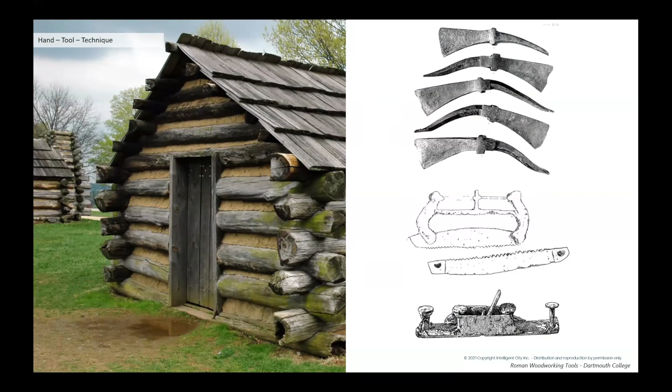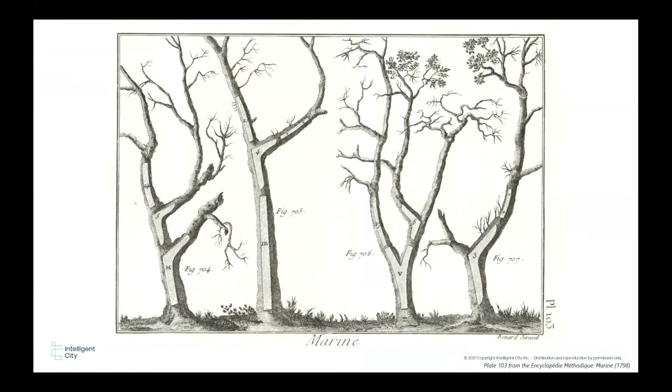A quick history lesson, because I think it's really interesting to note that the tools we use have always influenced how we design and construct buildings. In the pre-industrial era, manual work and tools led to highly efficient and unique building components requiring minimal machining. But these building elements used to be made specifically for a specific purpose in a specific shape. That uniqueness kind of got lost through industrialization as it led to mass production and standardization. That obviously increased the potential output of our industry, but it also led to repetitive processes, and most importantly, to a fragmentation of our industry that has basically inhibited innovation for many, many years.

Other industries have since developed technologies that allow them to introduce variability within scalable manufacturing technologies. However, and this is very important because I'm sure you have seen this picture, buildings are not cars. The term mass customization is misleading in that the main parts of cars are actually standardized. Building systems and buildings need much more flexibility and adaptability to become applicable on a larger scale and to really break through with the sort of platform paradigm.

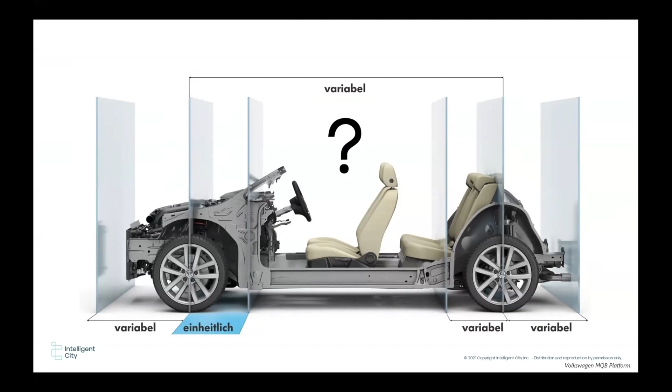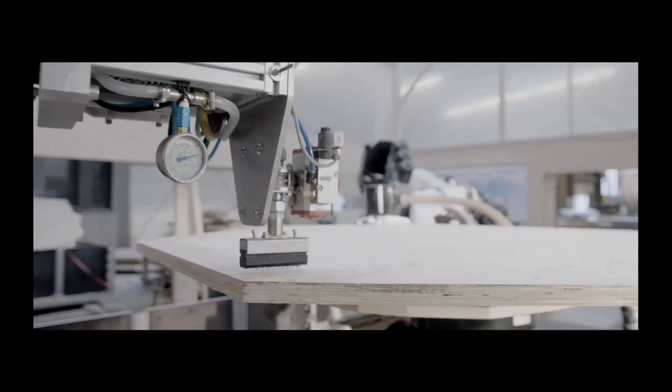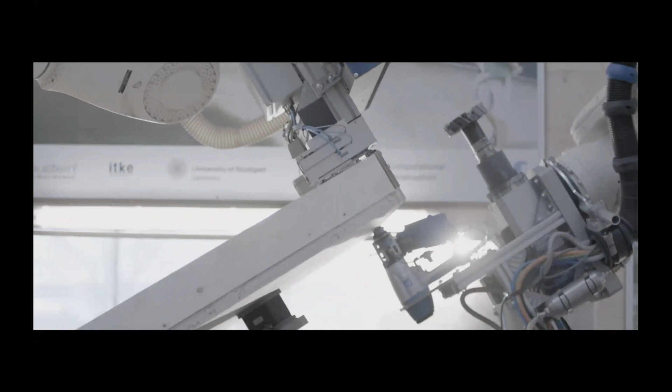In my previous job, I worked at the Institute for Computational Design and Construction at the University of Stuttgart, where we explored the potentials of novel manufacturing technologies for construction and architecture at scale. We developed manufacturing technologies and ultimately in conjunction with design and structure, which led to many projects that showcased what an integrative approach in our industry could look like.

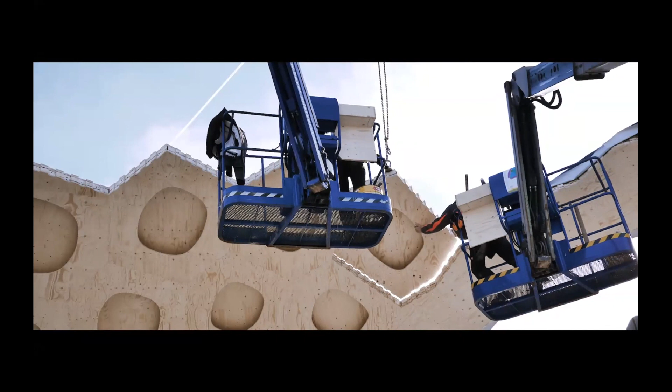What if we don't design only the design, but we design the design system, we design the manufacturing of the design system, and we design how we design as well. The journey of our industry throughout the centuries, I believe, can be seen as a negotiation between adaptability, the flexibility of design, the design system, and manufacturing intelligence - how manual, how automated, how ultimately intelligent and adaptable it also is.

Recent innovation has opened up opportunities for platform-based design processes and automated manufacturing. That's no surprise. But the adaptability and versatility needed in architectural platforms to be successful is really still missing. At Intelligent City, we believe that instead of falling into the trap of one-off parametric projects or standardized industrial prefab, the future really lies in between, in the convergence of high-tech manufacturing with a lot of adaptability and parametric design, which ultimately leads to scalable processes.

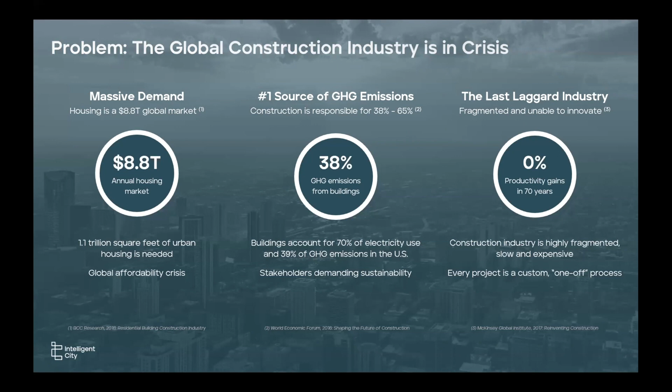And this is what we call parametric platforms. With the challenges we are facing today, it is really inconceivable why our industry has not yet found scalable and adaptable technologies to deliver buildings more efficiently, more affordably, and with zero carbon footprints. This is why Intelligent City has developed a parametric platform for 4 to 18-story mass timber urban housing projects.

We combine 3 paradigms that one could say were previously unfamiliar to our industry. A product-based design approach to develop the building as a product to make sure it is socially inclusive, affordable, and has high livability metrics. We focus on mid-rise densification because that's where we also see the biggest potential for cities to grow. It's a platform-based development process. It's infinitely configurable across building designs. It has pre-integrated design engineering, and it uses mass timber as a primary material because it's the most promising building material that we have and the only one that promises to be carbon zero.

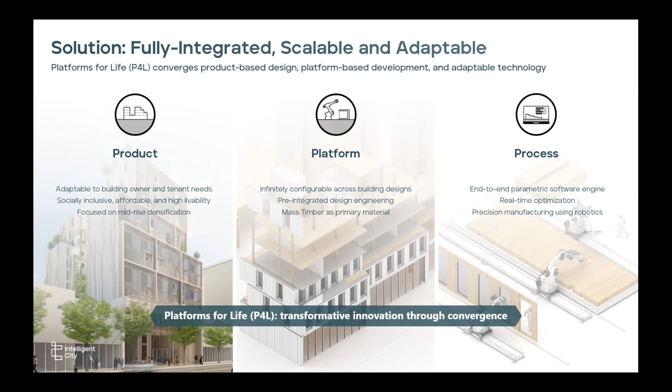And we combine that with an end-to-end parametric process that also includes manufacturing technologies in order for us to be in control of how things are being manufactured. This is what we call platforms for life, transformative innovation through convergence. And I want to talk a little bit about all three of these aspects and how they sort of come together into this product-based approach of a building and how flexible it ultimately really is.

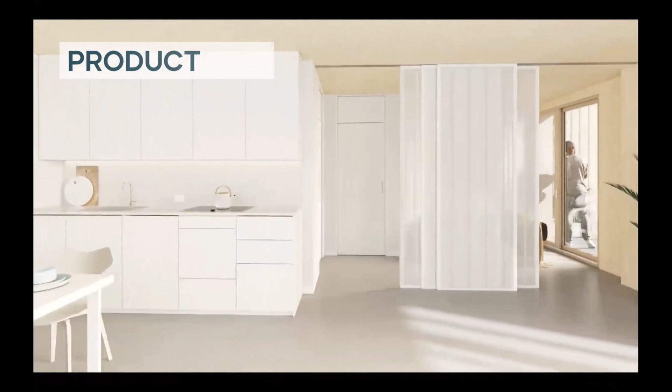The product is the result of over a decade or even 2 decades of experience in urban livability. The founders of Intelligent City have worked in this realm as architects for a very long time. And we created this product in order for it to be livable, to create a sense of home, to enable communities and inclusion. There are many design aspects inside of this DNA that we have developed.

Compared to typical projects, our buildings provide more sunlight, more cross-ventilation. There are double-sided apartments. You don't have double-loaded corridors with interior bedrooms. And most importantly, they are just higher quality. They need less space. You can live, you have more livable area with less required infrastructure space in your building. And therefore, we can also have more apartments in a building without losing any of that quality.

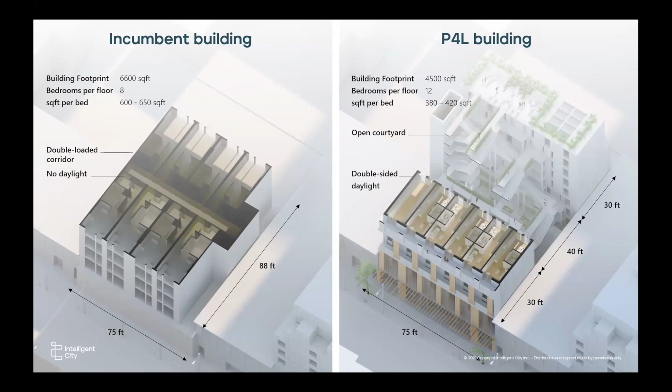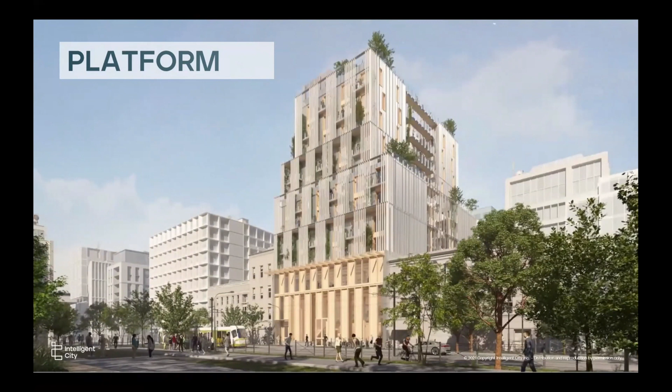Our building platform is based on a number of parametric components. These are, most importantly, integrated double-layered floor panels that already include from the factory certain mechanical and electrical components, passive house envelope panels, all made from mass timber.

So we create the core and the shell of the building as fast as possible, and it's completely made out of mass timber. The componentry is not a kit of parts. It is based on a range of grid spacing that allows us to adapt every building shape to various sites and needs. It enables this sort of flexibility. We can deliver small and larger projects with different shapes and different heights.

This is part of the design process, the design system, within which you can navigate. But most importantly, the platform integrates the design philosophy in that a library of apartment types can be assigned to the building system. It is based on a certain grid spacing that is variable. You can include 1 bedroom, 2 bedrooms, depending on how many grid spaces you want to occupy.

But we also try to make sure that the apartments can be changed later on. If there is a change in the building life cycle, which surely will happen in 25, 40 years, and you want to combine multiple apartments into a bigger one, that should be possible. That should not lead to the building being demolished.

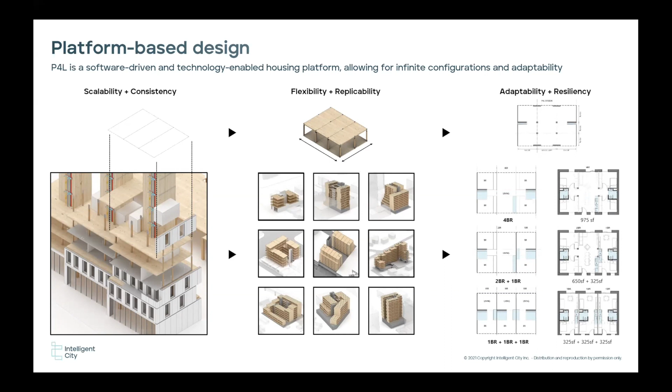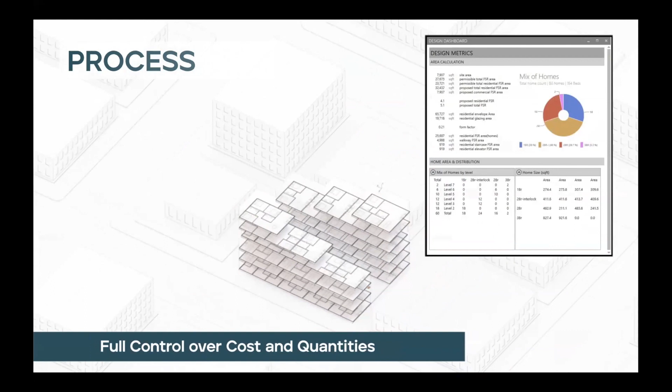Now, that flexibility can be designed by hand, right? It can be designed as a design system that you can act on in a manual way. But I think the keystone in order to enable all of this design philosophy and the ambition of a scalable process, you need a design tool that allows you to work within that flexibility, to navigate that design space and to get enough feedback.

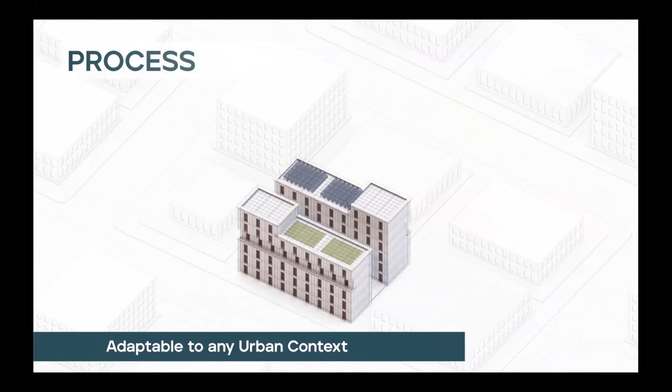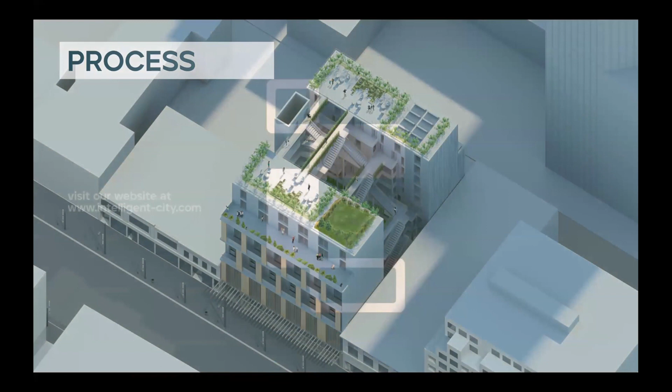So we have developed what we call an end-to-end parametric software that enables this adaptable building system. Based on multivariable design, live database integration, we can optimize for different metrics like livability, quantities, cost, and carbon. In the digital design process, we basically interactively adapt the distribution of homes, different apartments, how the stacking works.

Then a live link, like you can see here, the software populates a design option with all fully detailed building system based on all these building elements that we have previously developed. And then we create a virtual twin. We get buy-in from all stakeholders before manufacturing and on-site construction commences. So everything we design is buildable.

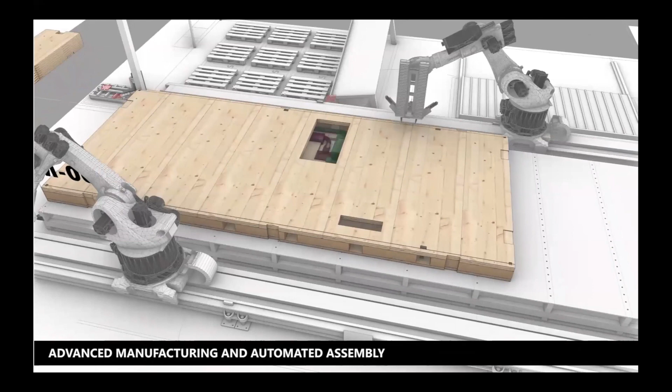All system components have been developed together with advanced robotic manufacturing technologies, combining automation and adaptation. So this is off-site construction. It's obviously, as probably everyone who participates here knows, faster and more precise and predictable. But developing the manufacturing technology in conjunction with our design technology and in conjunction with the designs that we want to be able to deliver, that has been key for this platform to be successful.

We're not replacing the designer, we're not replacing the architect. We are developing only a design system. If you want, we're developing a game that we can play, but we are making up the rules. So in essence, we are augmenting the designer. We are giving the designer, and ultimately clients and stakeholders, the ability to properly make decisions based on information that this design system gives them.

And I think that's very important, because computational design or generative design, however you want to call it, is not here to replace anyone in this process. It's only here to assist us and to make us aware of the decisions we take, and to empower us ultimately to make the right decisions and to concentrate on those things that are very important.

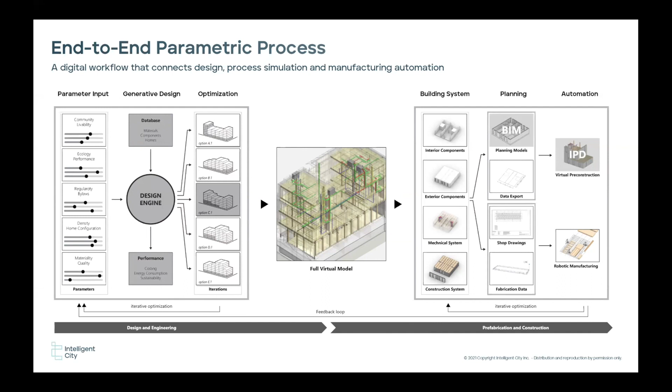It comes, of course, with a very important mission: we have to build as much carbon neutral housing as possible. And by combining these technologies with mass timber, we can say that today we can already reduce annual GHG emissions by 93% compared to incumbent buildings. And in fact, our buildings can be carbon negative, even with a life cycle of 90 years.

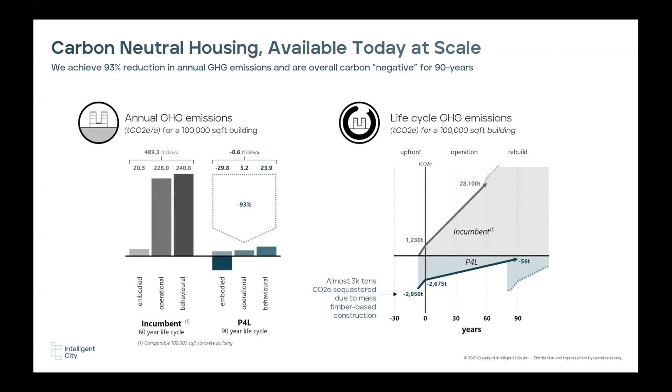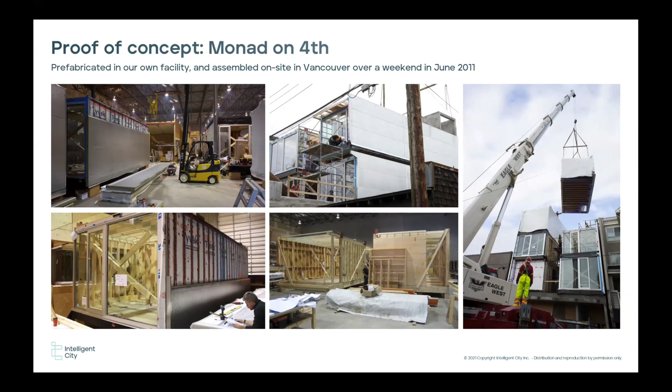Intelligent City emerged over a decade ago with the first showcase building. Back then, it was a modular construction and it didn't use mass timber, but that was basically the only difference. The design system has been developed since then, and we realized that if we want to deliver this at scale and with that flexibility in mind, we have to combine the design ideas with a parametric workflow in our own manufacturing. We have since worked towards commercialization and readiness.

We are now basically just moving into our factory and installing the manufacturing equipment, and we're delivering, I'm happy to say, the first buildings already later this year. Our technology has always been developed to be scalable, so also the manufacturing process and workflows of this platform are part of the platform and can be replicated across multiple locations.

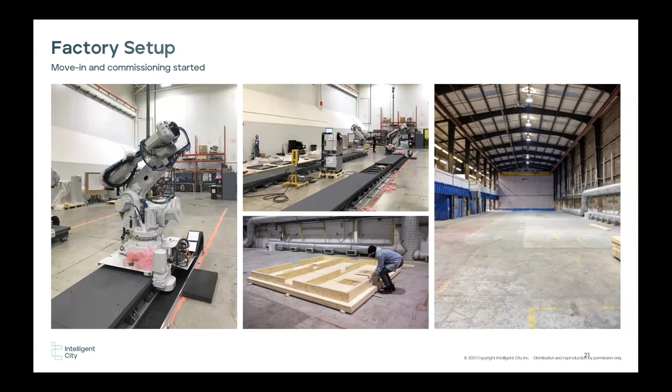We believe that in order to achieve a paradigm change in our industry, and to ensure that the future of construction can solve the fundamental challenges of sustainability, affordability, and livability, we need integrated solutions such as the one Intelligent City is offering. Thank you.